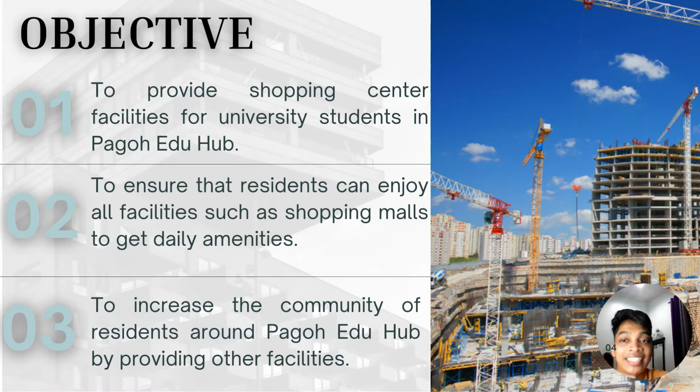Next, we will show the building layout we have designed for our shopping complex. The first picture on top shows the front elevation, and the bottom picture shows the left elevation.

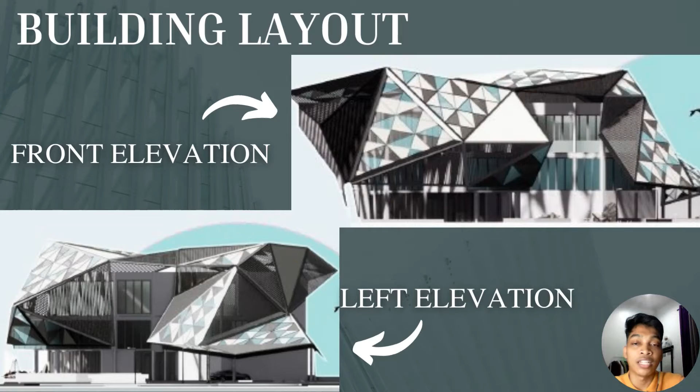Now I will present about the substructure component. The substructure is the lower part of a building which is constructed below ground level, in direct contact with the supporting soil. Substructure components are designed with soil conditions in mind. The soil condition in this project has high clay and silt content, since these are fine-grained soils.

Pile foundation takes the load down through the weak soil to a firmer layer of soil or rock below, allowing the load to be distributed to a solid base that can support the building. The function of the substructure is to transmit the loads imposed on the structure to the soil below it, so the type of soil used is very important.

In this heavy construction, much greater loads are carried by the soil, so the foundation design is often more complex, and we select a deep foundation such as pile.

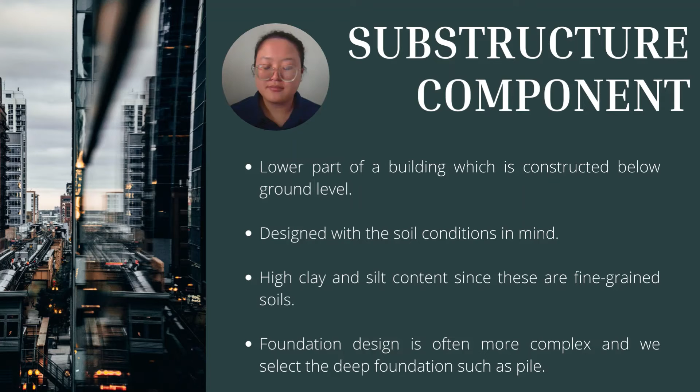For the piling element, a pile foundation is defined as a type of deep foundation that comprises a long, slender column used to transfer the load coming from the superstructure to the lower laying ground, thereby providing overall support to the structure. The pile foundation is made up of concrete and driven deep into the ground.

Pile foundation ensures that a structure can stand firmly on top of a strong foundation, as long as the columnar elements are located in the strongest and most stable part of the soil or rock layers. Pile foundations likewise prevent soil erosion and other damaging elements and factors from compromising the stability of the structure's foundation.

For the shopping complex educational hub project, we suggest using precast concrete piles, because they can be prepared using ordinary reinforcement and can be easily combined with a concrete superstructure. The length of the precast pile is 10 to 15 meters, with a maximum length of 30 meters. Besides that, the usual load capacity is 300 kilonewtons to 3000 kilonewtons.

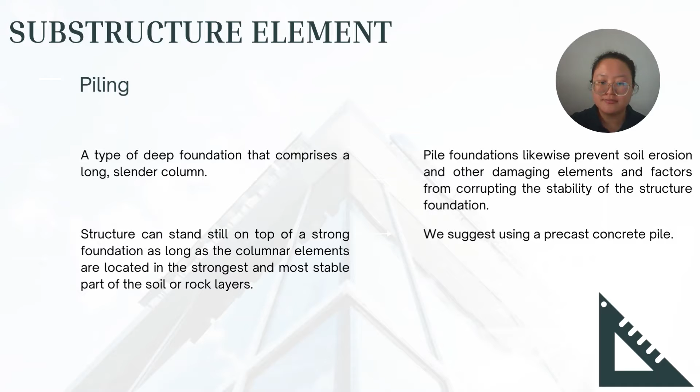Next is the element pile cap. Pile cap is defined as a concrete block cast in the head of a pile. Pile cap carries load from the structure to the pile, which then transfers load to firm soil.

External pile forces are most likely to be strongest near the ground surface. The depth and pressure of the ground increase its stability. As a result, the top of the pile is more vulnerable to movement and stress than the bottom of the pile. Pile caps are thus added to tie the pile heads together to reduce individual pile movement and settling.

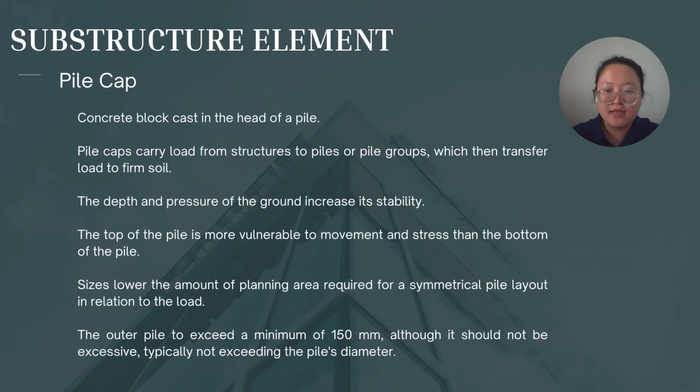This pile cap size lowers the amount of planning area required for a symmetrical pile layout in relation to the load. The pile cap should allow the outer pile to exceed a minimum of 150 mm, although it should not be excessive, typically not exceeding the pile's diameter.

The next one is column stump. The stump is the simplest and most familiar footing used for the vertical support and the transfer of building loads to the foundation. The stump must have a footing placed underneath its base, to spread the load transfer to the stump from the building.

This support beneath the stump is called a pad or soleplate. Concrete stumps are provided with concrete pads poured in situ on the site. Column stumps made of concrete offer more support, stability, and strength to the floor and wall of a building. The stumps are able to distribute the weight of the floor more evenly, which results in the foundation developing less wear and tear.

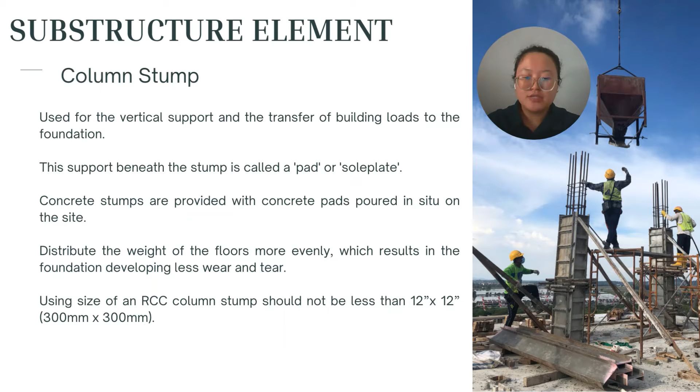We suggest using the column stump with a size, by RCC standards, of not less than 300 mm length and 300 mm width.

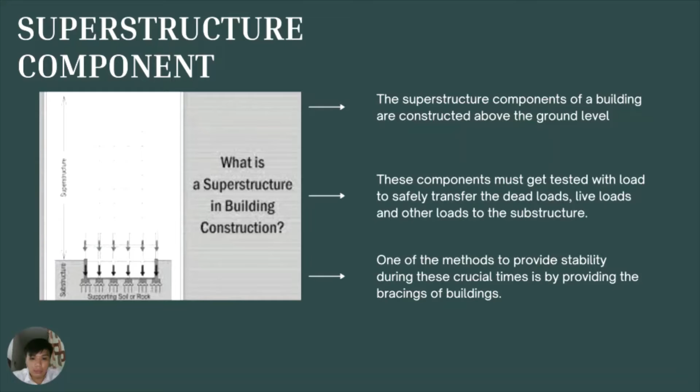Third, one of the methods to provide stability during critical times is by providing bracing of the building. By providing bracing, column and beam work together and carry lateral load downward.

So now I want to explain all the elements and functions of superstructure. The first one is roof. Roof is the exterior and uppermost part of any building structure. This structure is a covering that protects the building from rain, wind, sun, and other adverse effects.

For the second is parapet. The parapet is a short wall barrier that is constructed at the edge of the roof, balcony, or walkway for mainly protection. This can be constructed using reinforcement concrete.

For the lintel element, it is a type of beam structure constructed above all wall openings to support the load coming over it and transfer it safely to the side wall.

The fourth is slab. Slab functions as a horizontal structural element in a building to serve the purpose of floor, roof, or ceiling.

For the fifth is beam. Element beam is also a horizontal structural element with a specific depth and width running with a span. It withstands vertical load, bending moment, and shear force.

For element six is column. The column is a vertical structural element that carries compressive load. This is one of the critical structural elements in any building structure, whose failure can result in progressive collapse.

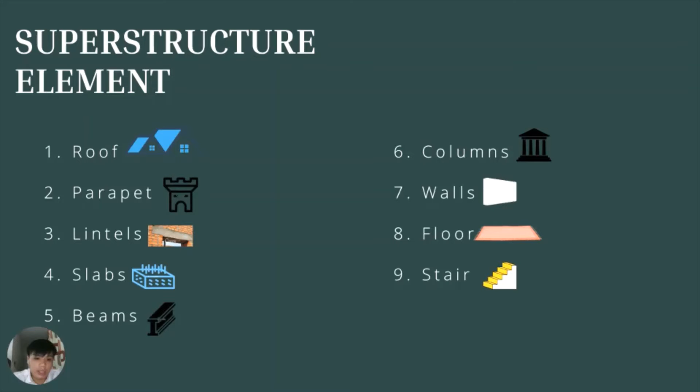For the ninth element is stair. A stair is a series of step flights constructed to move from one floor to another. A staircase is a room or enclosure where the stair is constructed. The space occupied by the stair is called a stairway. There are different types of stairs like continuous stair, straight stair, and turning stair.

Next, I want to present the conclusion of the superstructure component. First, the superstructure design is critical when it comes to any structure. It is the major part of a building which not only accomplishes functionality but is also exposed to the external environment.

When engaging in superstructure design, it is advisable to consult with a professional structural engineer to ensure the building is designed appropriately. For the shopping complex Edu Hub, almost all structures use BRC concrete because it can bear heavy load, and a shopping mall has many users, so the building needs quality material to bear the load and for the safety of users in the building.

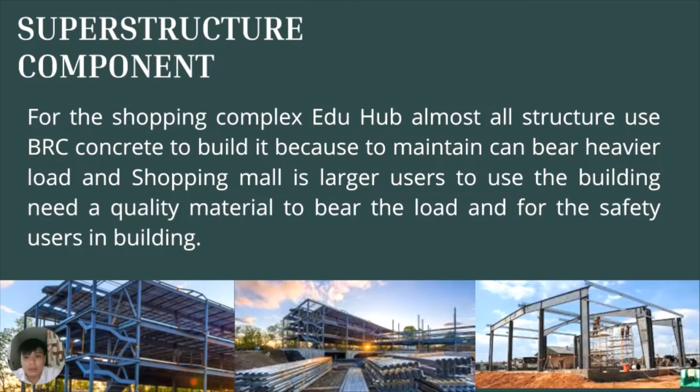I will be presenting on the project costing. When it comes to project costing, it can be simply referred to as the bill of quantities, also known as the taking off. This bill of quantities and taking off of the project will simply guide you and give you descriptions of the expenses and allocated budget that can be listed to proceed or carry on this project easily.

This bill of quantities consists of a few elements such as the preliminary works, earthworks, plumbing, electrical works, and also superstructure and substructure. As we can see from these preliminaries, the first element is excavating. We will usually clear the site of all shrubs and undergrowth, including grubbing up of roots, and dispose of that

as directed. Secondly, excavate oversite average 200 millimeter deep and cart away as directed. Thirdly, excavate oversite to reduce levels commencing from stripped level exceeding 0.30 meters deep. And finally, excavate foundation trench starting from reduced level not exceeding 1.50 meters deep.

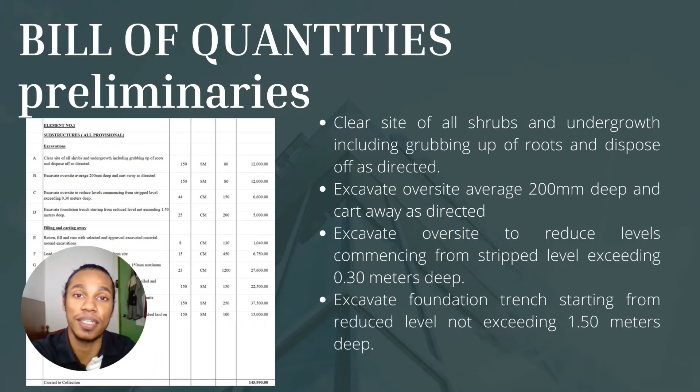The following part of the project costing is the provisional cost. The provisional costs are the following provisional items to be measured on completion of the works and priced in accordance with rates contained in this bill of quantities, or pro rata, or deducted in whole if not required.

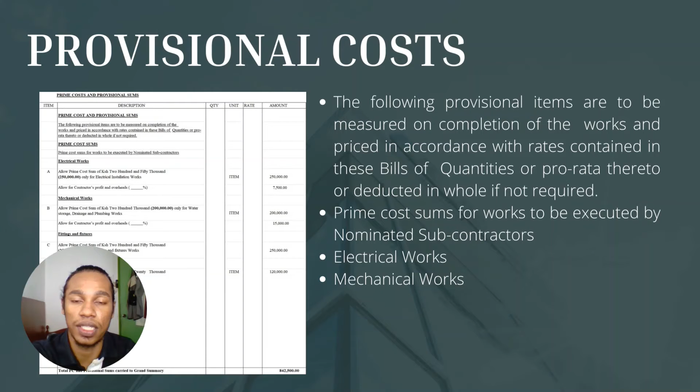Prime cost sums for works to be executed by nominated subcontractors, and provisional sums, are known as electrical works, mechanical works, plumbing works, and also the earthworks, including roadworks.

And this will be the bill of quantities summary in this project of the Pagoh Educational Hub shopping complex. There are a few elements such as substructures, reinforced concrete superstructures, walling, roofing, doors, windows, external finishes, and also internal finishes. As you can see, these are the prices that are estimated for this project.

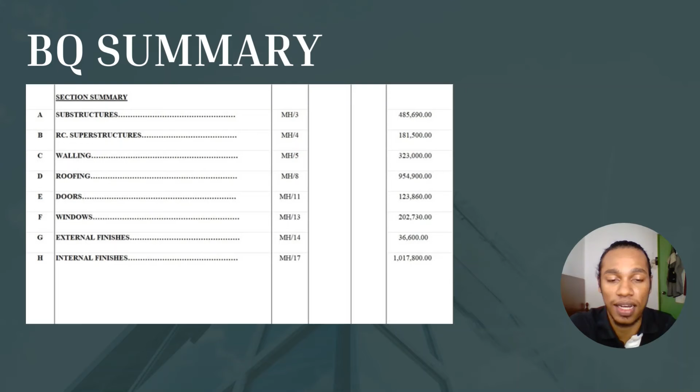I will also be talking about the project management. Good management will lead to a good project and a successful project. As a project manager, there are a few steps that a project manager needs to follow to make sure it meets all the requirements for the project.

As part of the project overview, this project has been taken by using the design bid build method, in which the project owner Saim Dabi Sendirian Berhad will employ the architect, engineer, and designer to create and develop the new structure, as we were given the task by Saim Dabi to complete this Pagoh Educational Hub shopping complex.

Why we have chosen this design bid build method is because it can save money and maintain fairness among the contractors submitting bids. Apart from that, the design bid build technique is very effective for this kind of project because it gives a quicker project completion time. It will not take more than 2 years or 3 years.

Every project planning should also include the project management. As a project manager, there are a few project management stages that I have to follow. In this project, these are the steps and stages that have been taken into consideration: stage one, authorizing a project. When you're authorizing a project, you have to look for the business case or the purpose of this project. And stage two, starting a project.

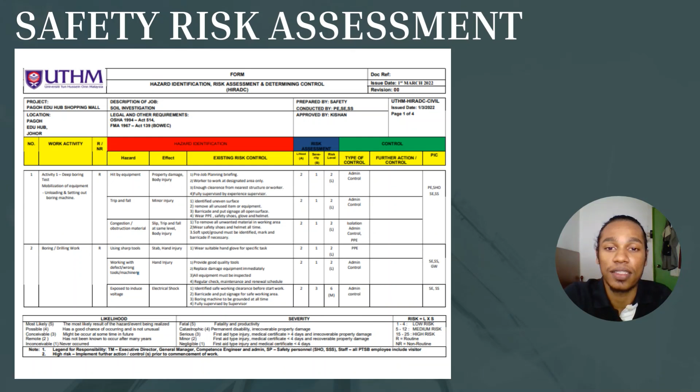So as we can see, the construction schedule is 234 days. Contract writing is before, which is the initiation of this project, that will be taken into consideration for 31 days. Apart from that, contract signing, secure financing, then we have to obtain permits, site work starts, plumbing work starts, electrical work starts, all the civil work starts, and it is expected to end on the 26th of January 2023, which is included in 234 days. Thank you.

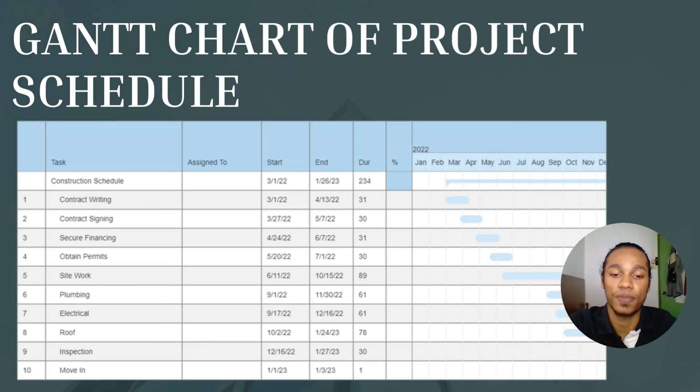As the conclusion of this Pagoh Educational Hub shopping complex project, we might conclude by saying that a shopping complex represents development in a community. As was mentioned above, one of the developing areas is the Pagoh area, which has attention and a strategic position, surrounded by many well-known universities, and also a lot of youngsters and students that are growing up in the community. The shopping complex is one of the multi-purpose buildings that will be built in the Pagoh area.

In other words, the building of this shopping complex is advancing the ability to buy and take advantage of a variety of goods and services under one roof that can make life easier for the locals in the Pagoh area. Thank you.